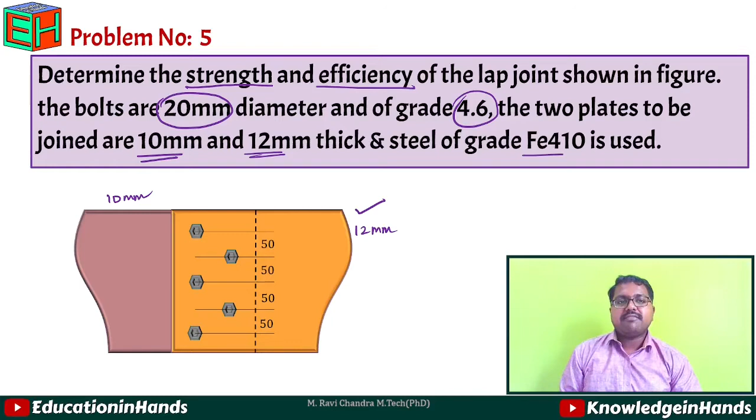So the bolts are of 20 mm diameter and grade 4.6 are used, and plates connected are 10 mm and 12 mm thick. So if we take this as 10 mm and another one as 12 mm, these two plates are connected using lap joint with a bolted connection like shown here, and steel of grade Fe410 is used for the plates.

So first, if you see the given data for bolt, it is given like diameter of bolt as d equal to 20 mm. So diameter of the bolt at shank will be equal to 20 mm. So with this, if we calculate the value of d0, that will be equal to d plus clearance. So clearance we will get it from table 19 of IS 800, which is equal to 2 mm for 20 mm bolt. So d0 will be equal to 22 mm.

And if we calculate the value of Asb, cross sectional area of the shank, that will be equal to pi by 4 d square, which is nothing but 314.16 mm square, and net area of the bolt at threaded position Anb will be equal to 0.78 times of Asb, that will be equal to 245.04 mm square. And then it is given like grade 4.6 bolts.

So 4.6 bolt grade means fub will be equal to 400 Newton per mm square and fyb equal to 240 Newton per mm square. And for plate Fe410, so fu will be equal to 410 Newton per mm square. And thicknesses of the plate, one plate is of thickness 10 mm and another plate of thickness t2 equal to 12 mm. Both are connected. And then since it is a bearing type of connection, we need to get the value of gamma mb, which is equal to 1.25 from table 5 for our calculations.

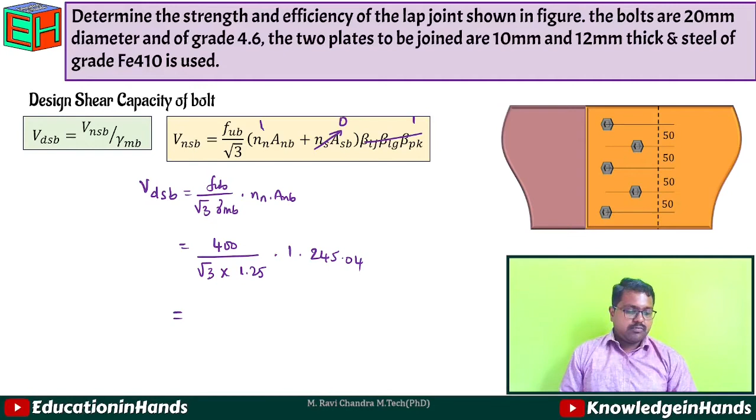So first, design shear capacity of the bolt, Vdsb. Since it is a lap joint, here we are having only one shear plane. So that one shear plane we will take it in nn, and ns into Asb will be equal to 0 and reduction factors will be equal to unity. So Vdsb will be equal to fub by root 3 gamma mb into nn into Anb. So that will be equal to 400 by root 3 into 1.25 into nn, that is 1, into Anb, that is 245.04 mm square, which will be equal to 45.27 kilonewtons. So this is the value of Vdsb for 1 bolt.

Now we need to calculate value of Vdsb for 5 bolts. Why? Because here 5 bolts are used for the connection. 1, 2, 3, 4, 5. So Vdsb for 5 bolts will be equal to 45.27 into 5, which will be equal to 226.35 kilonewtons. So this is the value for Vdsb of 5 bolts.

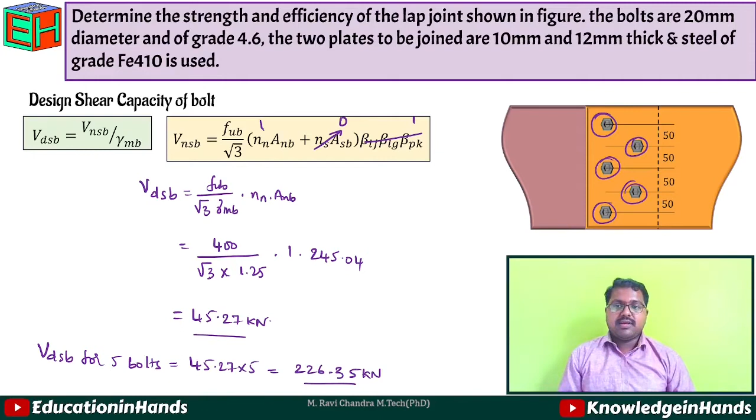The next, design bearing capacity Vdpb, that is equal to 2.5 kb d t fu. So here the kb value we can calculate by taking the minimum of e by 3d0, p by 3d0 minus 0.25, fub by fu, 1.0. So e, that is the edge distance, minimum edge distance will be equal to 1.5 d0, that will be equal to 1.5 into 22, which is nothing but 33 mm.

And p, minimum pitch distance, equal to 2.5 d, that will be equal to 2.5 into 20, which is nothing but 50 mm. So placing these two values, e by 3d0, that is 33 by 3 into 22, we will get the value as 0.5.

Then p by 3d0 minus 0.25, 50 by 3 into 22 minus 0.25, that will be equal to 0.51. And fub by fu, that is 400 by 410, which is equal to 0.97, and 1. So out of these 4, the least value is 0.5. So the value of kb is 0.5.

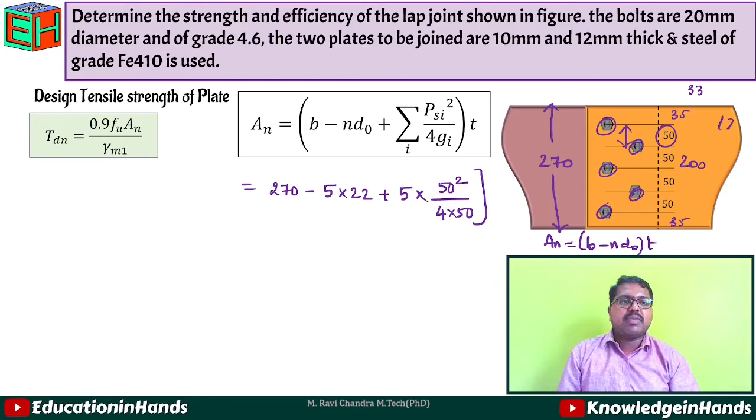Gauge distance between the bolts here is 50. So bolt to bolt, we are having 50 gauge distance, that is equal to 50, into thickness of the plate. So thickness of the minimum plate we need to take. Here one plate is 12 mm thick and one plate is 10 mm thick. So we will take the thickness of the thinner plate, that is 10. So if we calculate this, we will get the value of An as 2250 mm square.

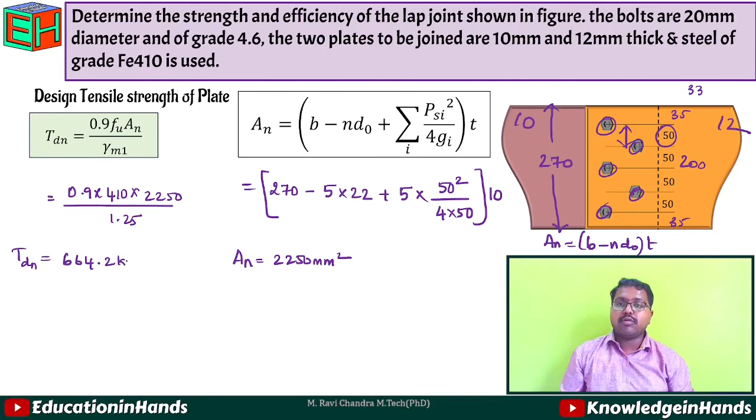So from this, we will get the value of Tdn as 0.9 into fu, that is 410, into An, that is 2250, by gamma m1, which will be equal to 1.25, obtained from table 5. We will get the value of Tdn as 664.2 kilonewtons. So this is the value for Tdn.

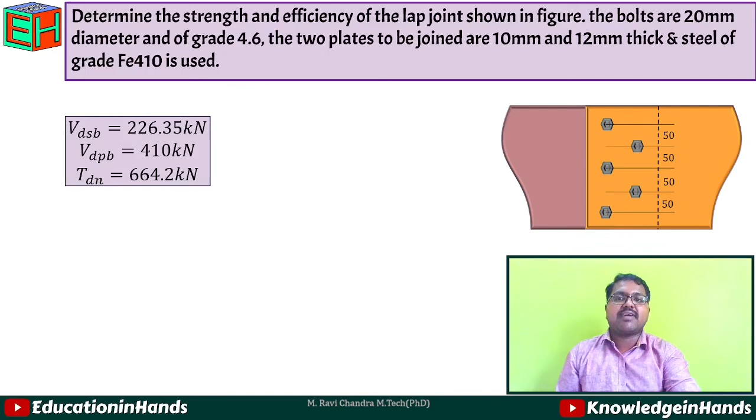Then next, we have Vdsb, Vdpb, Tdn. Out of these three, minimum value will be taken for the value of Vdb, that is the strength of joint. So the strength of joint Vdb equals 226.35 kilonewtons.

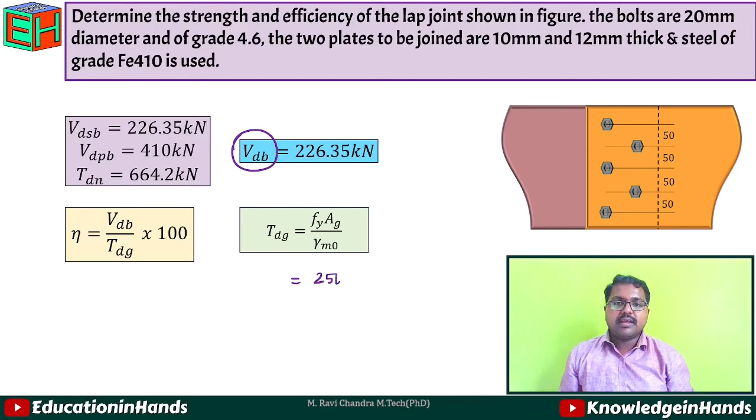Then to calculate the efficiency, we need to find the value of Tdg, that is the strength of solid plate. So that will be equal to fy Ag by gamma m0, which is equal to 250 into Ag, that is 270 into 10, thickness of the thinner plate, by gamma m0, which is equal to 1.10. We will get it from table 5 of IS 800, which will be equal to 613.63 kilonewtons. So this is the value for Tdg.

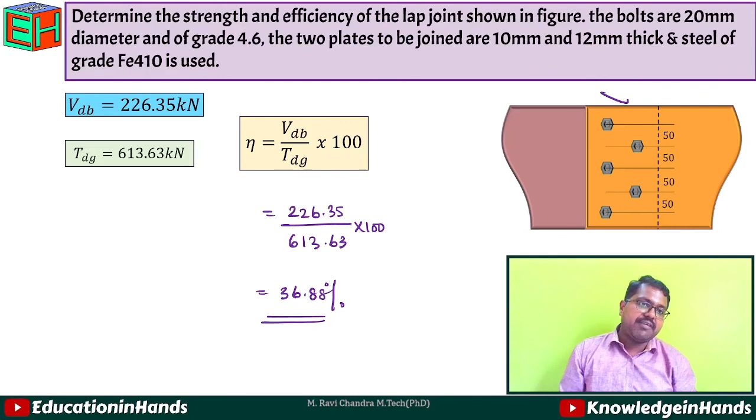So from this Vdb and Tdg, we will calculate the efficiency as 226.35 kilonewtons by 613.63 kilonewtons into 100, which will give efficiency as 36.88%. So this is the efficiency of this joint, where a lap joint between 10 mm thick and 12 mm thick plate is connected with 5 bolts in staggered pattern.

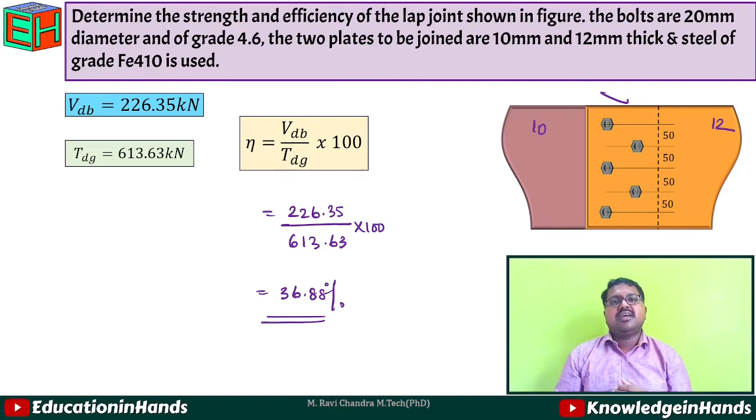So this is it for the problems on efficiency calculations for different types of connections. In next class, we will see a new topic, that is the friction type of bolted connections, which is used for HSFG bolts. See you in the next video.